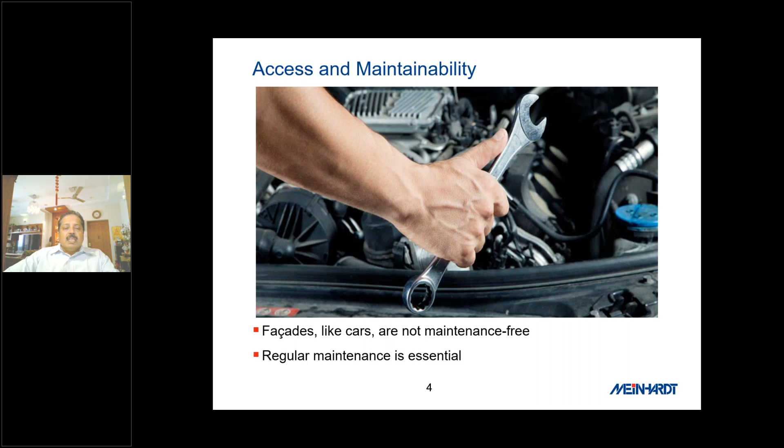Access and maintainability to upkeep the facade appearance is always important, because the view from inside and outside always gives the landmark status to the building. Over time it becomes a landmark to its respective area or geographical location.

Maintaining it extends the lifespan of the building. Regular cleaning and ad hoc replacements have to be done with the BMU for any high rise going more than 40 meters.

Look at the towers and height comparison of buildings, like how this London city looks. Solutions vary depending on height and geometry - 0 to 50 meters, 50 to 100 meters, 100 to 200 meters, and 200 meters and above - now going up to 1000 meters. Reaching that space and maintaining that element is not easy.

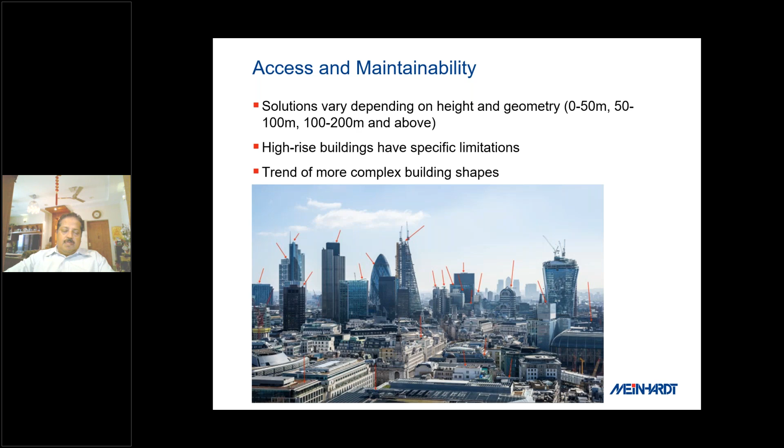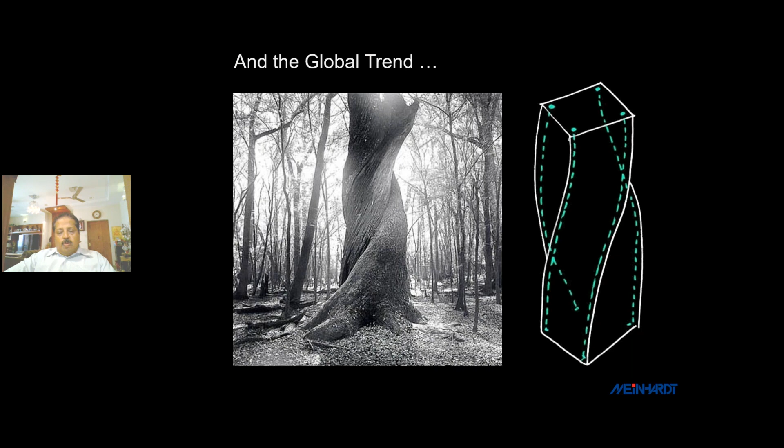High-rise buildings have specific limitations in terms of user requirements, timing, weather conditions, and the trend of more complex building shapes, which is critical for designing any BMU to reach every nook and corner of that facade geometry. In India, buildings traditionally come in simpler forms, not complex geometries like this, but globally the trend is now going toward complex geometry.

Access and maintainability requires additional material costs for glass replacement units, and also facade lighting and maintenance if there's any facade-integrated lighting, as well as opening proportions in the facade for maintenance and access. Otherwise you're not able to reach and maintain the facade elements.

Also, replaceable external features whenever there's damage - how to integrate the design into the building. This is one of the towers where this place is used as a cafeteria.

At the same time, they use it for maintenance in a revolving tower, I think in Kuala Lumpur. So this system is a completely essential part of planning and design for such high-rise towers.

This machine can reach up to 22 meters. You can see the telescopic jib of this cradle, and it's tiltable also.

It must be incorporated in the early stage of design. Anything such as BMU for any high rise, you need to start from the concept schematic stage to incorporate, because this machine's heavy loading reactions have to go to structural consultants. Sometimes this machine becomes 20 tons, you never know. So you have to be extra careful.

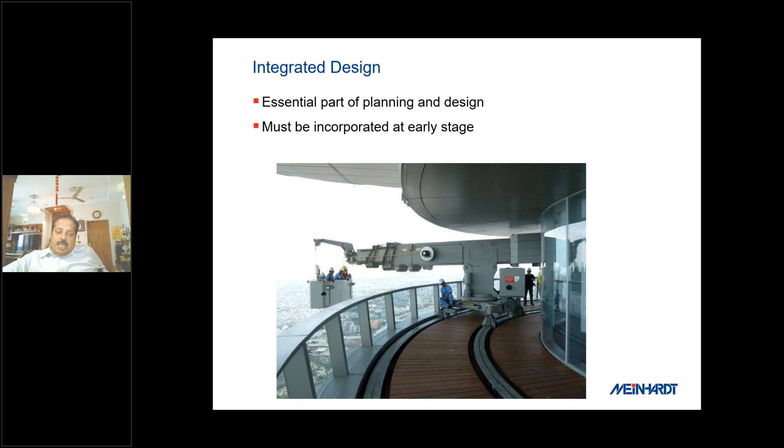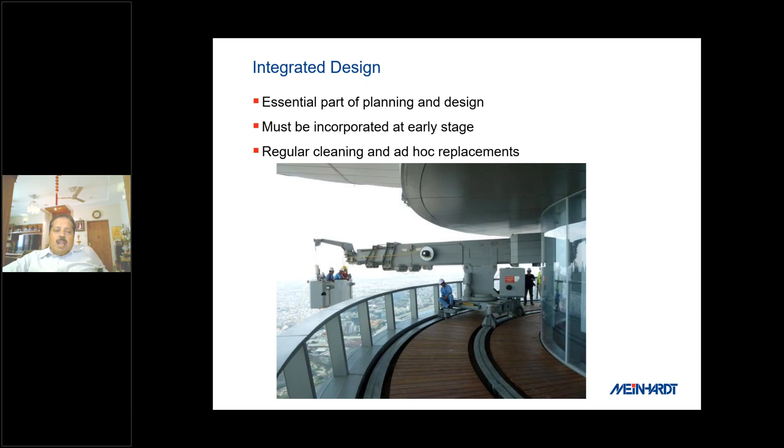In any high rise, you have to take care of determining the BMU system in the concept schematic stages. Regular cleaning and ad hoc replacements also need to be planned at this stage. The integrated design covers initial concept, where you have to zone out the BMU systems. You see the color mapping, elevation mapping, which we always do to identify the system.

Above 40 meters, you need to have restraint sockets at every 10 meter height at the width of every BMU system. Otherwise the BMU cannot drop down from the roof terrace, it rattles through the wind, and sometimes the cradle will rotate and lock, and you cannot evacuate the people. Sometimes we need to use a helicopter to evacuate such conditions where there is no restraint lock. So additional design considerations need to be addressed.

Also, the integrated BMU design - currently we are doing most projects with BIM integrated systems - requires roof space planning, because many things come out on the roof: BME equipment, MEP equipment, BMU, fire tanks, fire sprinkler tanks, AHUs, cooling towers. This has to be properly planned upfront at the schematic stage.

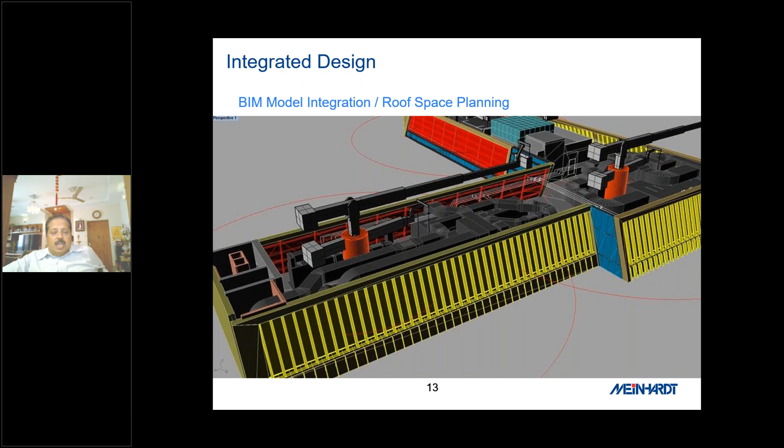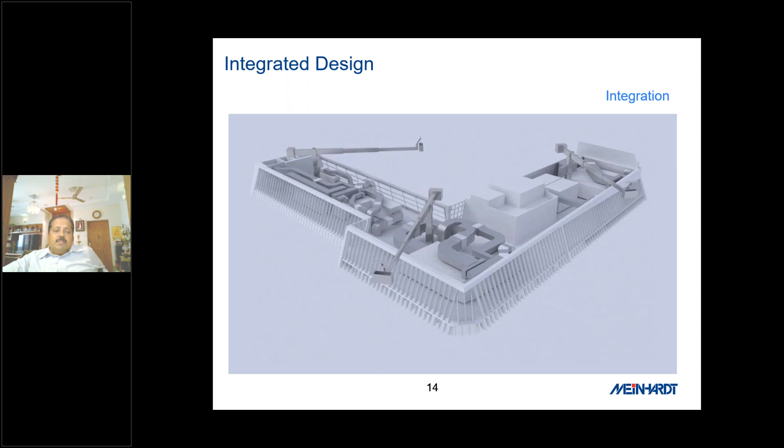You need to analyze how many systems there are, the geometry of the building, the beam, whether it's a sloped facade, and how much jib length is required. All this has to be tracked and trolled around the roof terraces. Very importantly, you need to provide water and power points at every 10 to 20 meter intervals for the BMU equipment to move around and connect. So roof space planning and MEP coordination is key in the concept schematic stages.

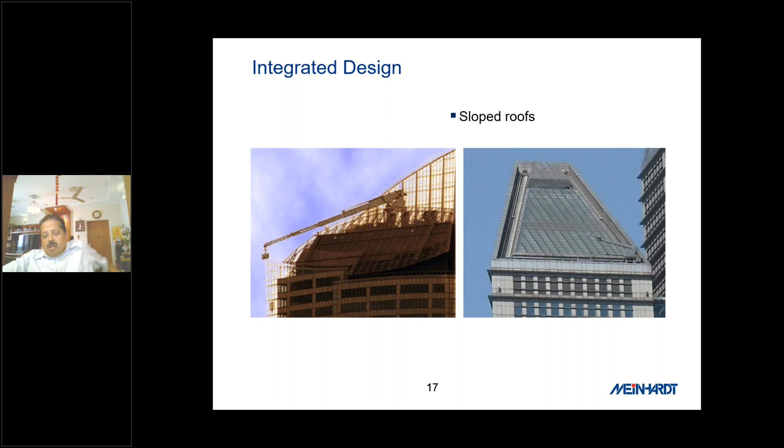Also, for the full extended jib position - currently about 22 to 25 meters jib length is only available in the market for executed jobs. So a full retracted jib position is required for such a cantilever position, and a winch needs to be attached. On the right hand side you can see the yellow rope - soft rope integration is also required for such geometries.

Look at this left hand side image: the cradle started from the left end of the building and transferred all the way here with a soft rope. The soft rope is for restraint, because it has to lift up and go back, remove the rope, and go back. The same way it comes down for cleaning and maintenance, it has to go back because of the geometry of the building.

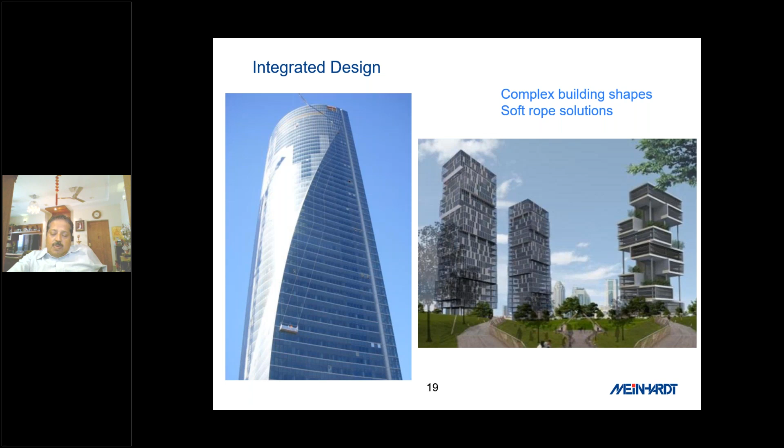The right hand side building is also in Delhi, a project of facade and BMU we did, where there is also a requirement for the extreme right hand jib - a passive rotating tower design concept requiring soft rope systems. There are a lot of systems available in the industry, so you have to customize to the requirement of the geometry design.

These are very complex - not something even a facade engineer alone can handle. This requires a vertical transportation team, and mechanical and electrical teams, to completely review this BMU. Many people just take some drawings and images, integrate them, and it becomes a white elephant. At the end of the day, people end up upselling and the investment goes to waste.

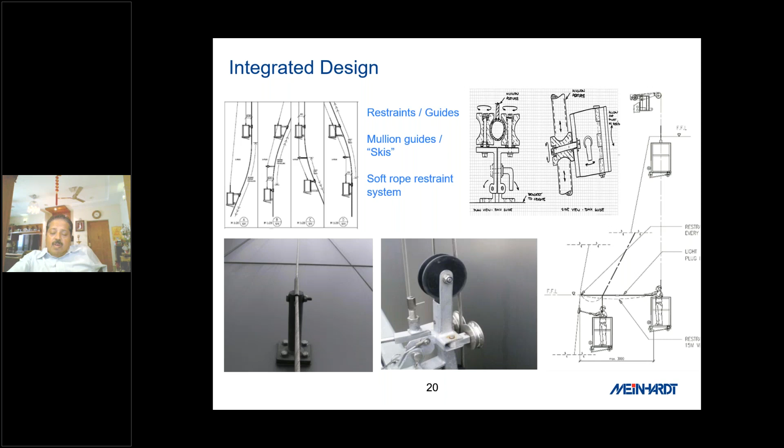Also, wherever not able to reach the place, you need articulated or arm expandable BMUs required, like the hand sketches we did for the project. At the right hand side, you can see that.

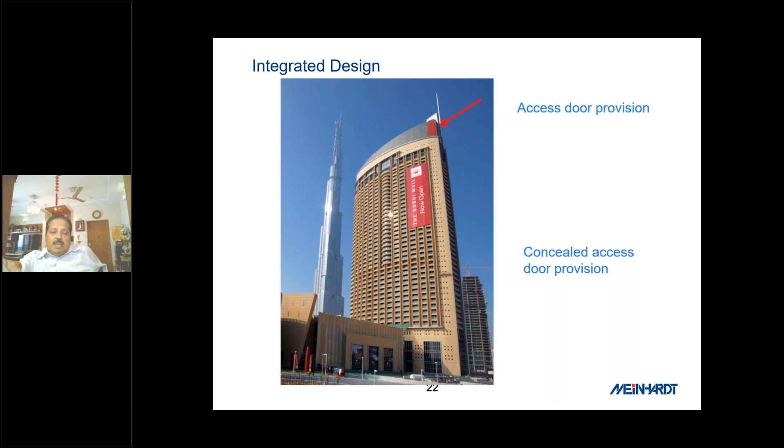Also, access door opening needs to be provided, a concealed access for door opening to access the cradle or anything to enter and operate the machines. Look at this door opening provided, but this aesthetical feature looks like red color. Whenever maintenance point comes, it can be opened, slid open, and locked back.

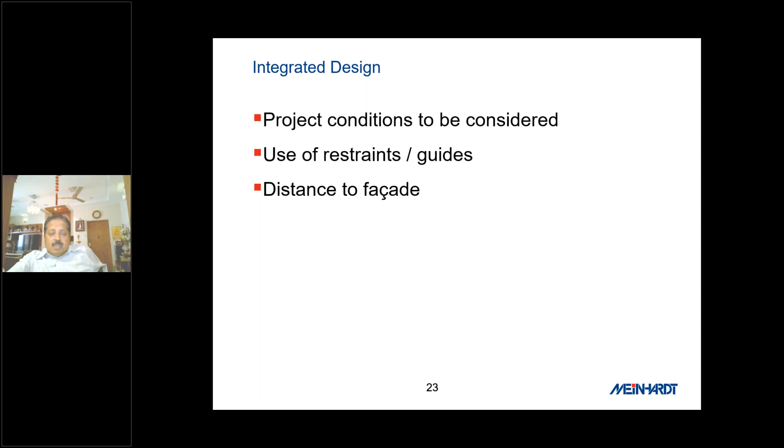The project coordinate conditions to be considered, as I said, use of restraint guidelines required, and distance to facade is a very key factor in analyzing and designing a system. Sometimes the distance goes 50 feet, about 10-15 meters reaches inside. So weather conditions for maintenance required very careful addressing, and other environmental conditions like rain, sandstorm, seismic activity, etc. During this time, you should not do the maintenance.

Citing all above, as I said, we need to see how many types of BMU systems are available in the industry, and this can be customized to suit the requirements for any project.

Sometimes the twin track, like a train track, we need to provide at the rooftop for the machine to travel all around the perimeter of the facade. So the cradle can be walked inside the roof itself, because you need luffing to bring back the cradle to the roof terrace to park in. This kind of roof terrace system will be expensive but safe and reliable.

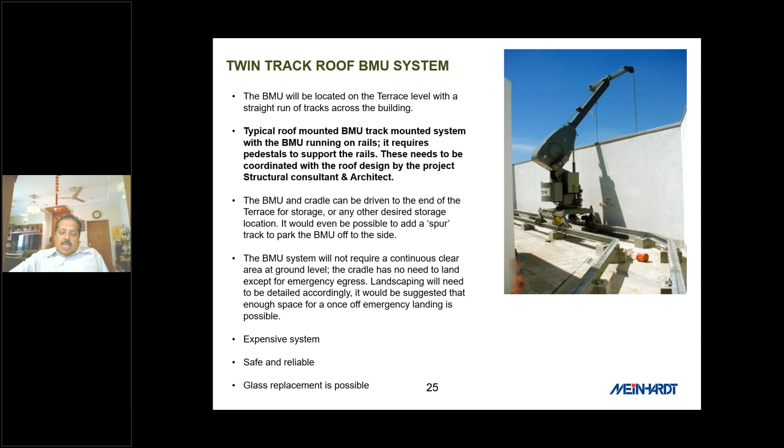This system can also do glass replacements. There are 2 types. Sometimes the parapet is at 1.1 meters, then you can put the track on the RCC slabs. Sometimes the parapet is more than 2 or 2.5 meters, then you need to erect an MS structure to track around this BMU. So you can see both conditions, on the RCC as well as the elevated tracks.

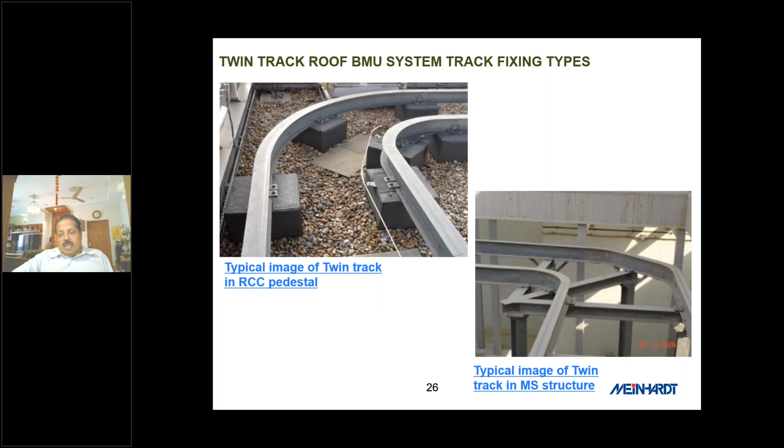Also, with twin track, you can integrate the material hoist. You can lift the glass together with the cradle and go and replace it, or you can do a winch separately and cradle separately. It's all part of designs, so it can be operated from the cradle itself.

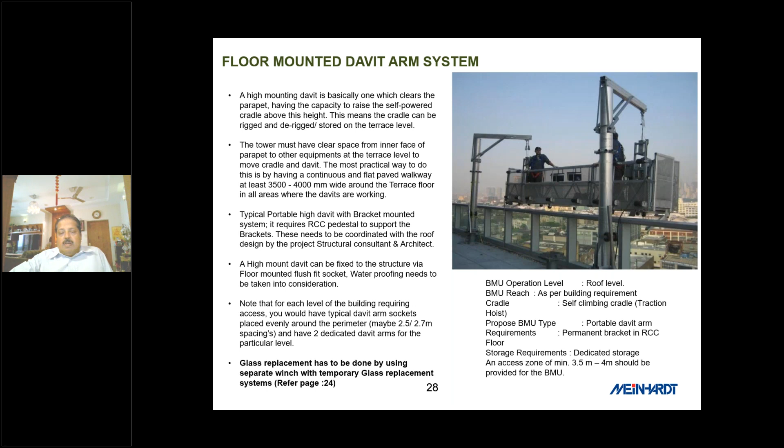Also for Davit, in some cases glass parapets come, then you cannot attach the Davit arms to the parapet, so you have to force it to be floor mounted. This is another system. You can cantilever up to 4 meters. Beyond that, the Davit arm system will not work from the envelope.

Floor mounted Davit arms, you can see these different types of brackets, sometimes concealed, sometimes exposed, whichever way you can do it, but aesthetically you can cover and walk over the brackets. Whenever required, you can open the manhole and put the davits, work, and close back. Still, you can use the access for the Davit arms.

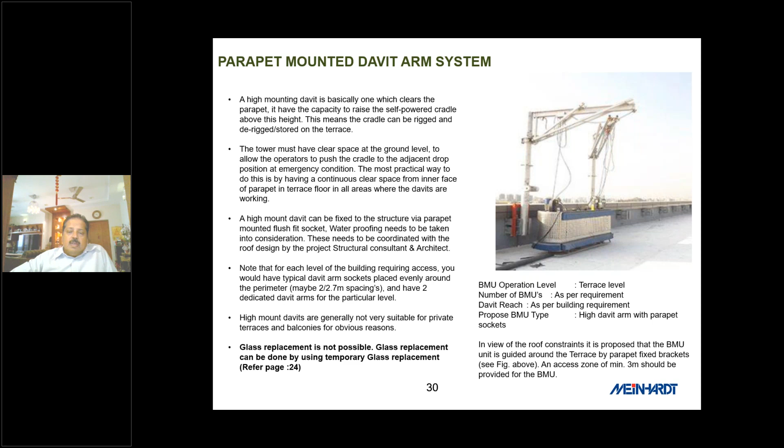Also, this is parapet mounted as I said. You can have independent brackets, or you can mount a rail on the parapet to traverse around the parapet down the thing. These are independent brackets, different types of independent brackets on the parapet.

Also the monorail with the cradles, this can be projected out. This can also be used, but this cradle needs rigging and de-rigging from the ground floor or any terraces below to come up and go down. You need to provide access at the parapet where rigging and de-rigging is required, just a small opening to lock in the cables to the winch and the rail. This has a limitation - up to 1900 mm only we can project it out.

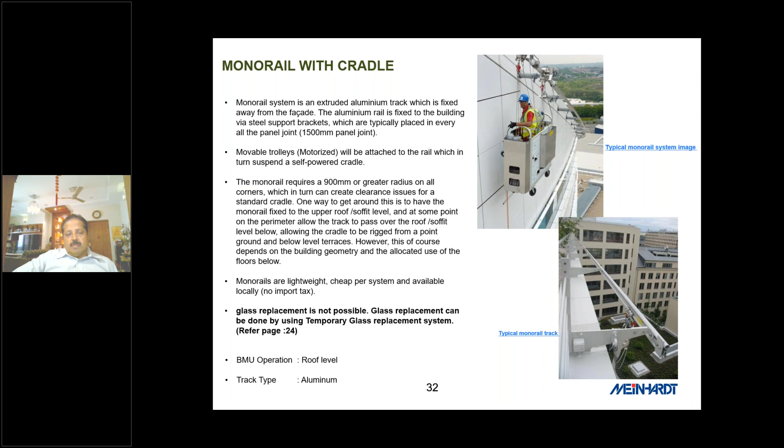Monorail track types, there are different types. You can see, you can travel around the same perimeter of the facade or the geometry of the facade. So you can put all types of monorail systems into these buildings.

Also, another option, up to 50 or 53 meters, you can do without a BMU on the building. You can get these cherry pickers or boom lift machines. There are a few types available. Currently, machines available up to 53 meters height have multiple luffing, maybe 90-degree luffing or multi-degree angle luffing available in equipment.

This is a multi-luffing angle. The earlier one is direct vertical, only one luffing to go recess inside. This is a 3 stages of luffing, so you can get any geometry reach, shown in yellow color. And the right one is only 2 types of luffing.

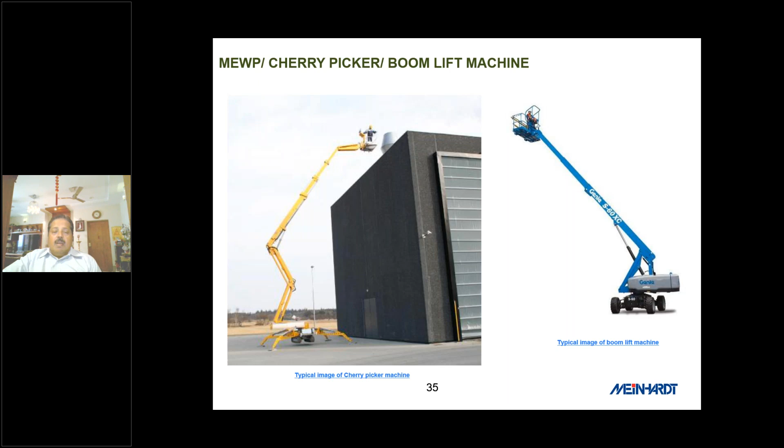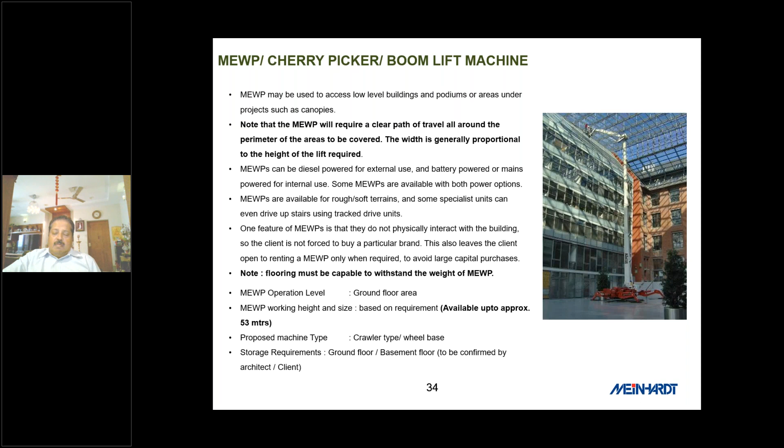The cherry picker boom machines can be used for interiors, but you cannot operate diesel fuel based machines inside because air conditioning smoke comes in. So you are forced to operate this kind of scissor lift by battery operated or electrical operated machines, or you can use a Davit or abseiling.

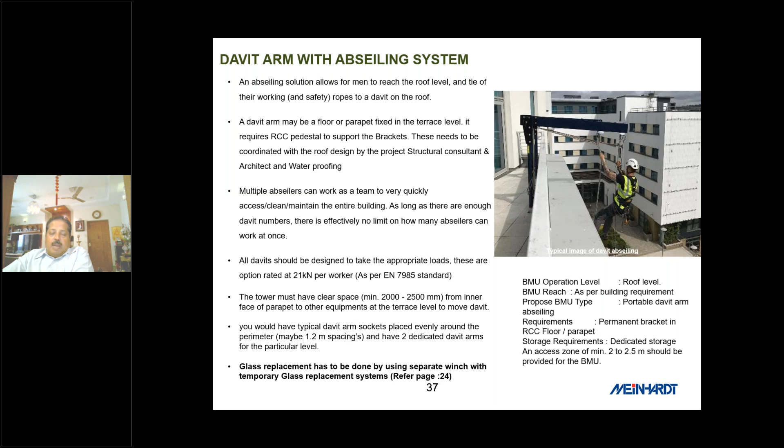Also the eye-bolt system. The next system is a Davit. You can provide for a man to suspend with safety ropes, mounted on the parapet. If there is no parapet mounted, then we can have this eye bolt type, provided as 15 kilonewton tested as per BS 7985. You can put one every 1.0 to 1.5 meter intervals, and people can come and abseil for cleaning.

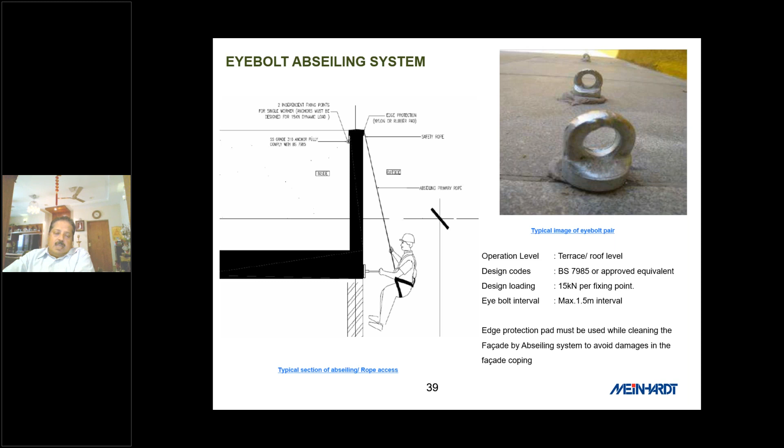We can provide 2 ropes, one for suspending the dead load of the human as well as the jerking load, and a safety rope can be added additionally to this.

These are other aerial working platforms for interiors. This can be different types, available up to 15 meters now, 14 to 15 meters. It can be folded and brought into the service lift to reach any level or floor. The size is about 1 to 1.2 meters width by 1.8 meters. As long as the lift size accommodates this, you can take it inside any portion of the building for ceiling or air conditioning duct maintenance, filter replacement, or ceiling lights replacement and maintenance. Also for interior atrium facades internally, you can use this up to 14 meters.

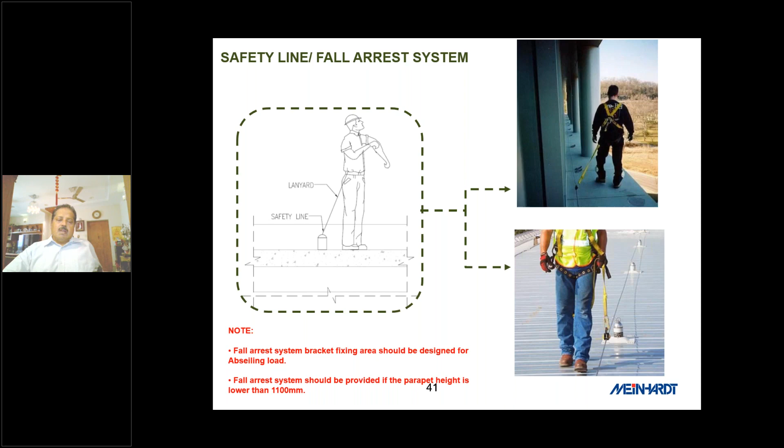Another option is a tucker pole, a cleaning pole now available up to 15 meters in height. You can pump soap and water through this, and you can clean, wipe and maintain the facade.

Then for temporary glass replacement arrangements where a permanent winch is not available, you can use a temporary winch or a Davit system to lift the glass with a counterweight, for temporary arrangements. Again, MEP requirements are key.

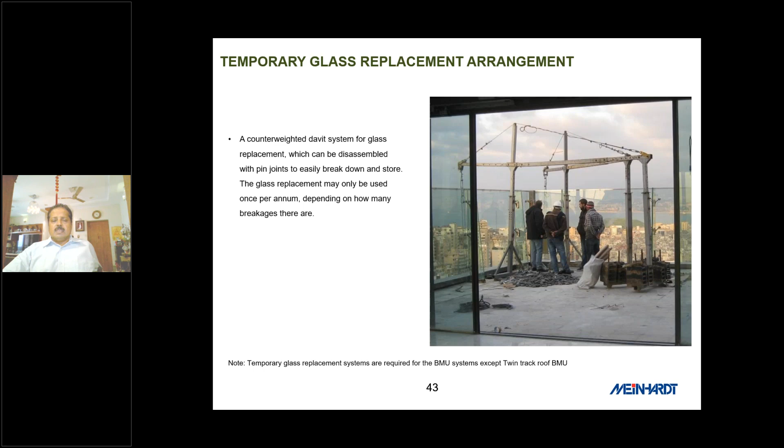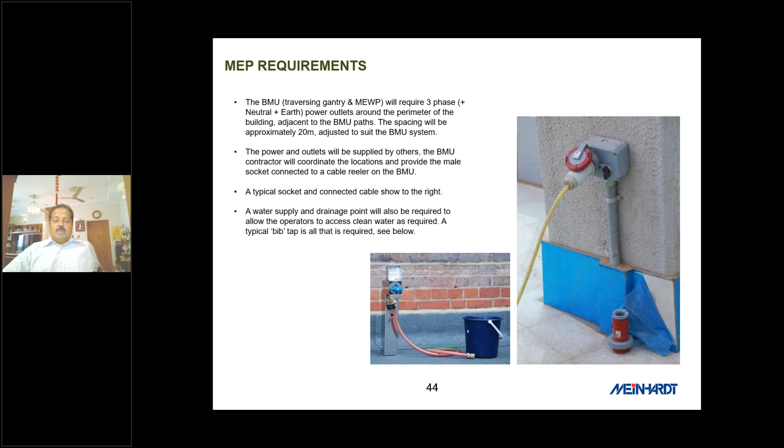You need to provide power and water at every 10 to 15 meter intervals. You should not exceed 20 meters, so that water fluctuation and power fluctuation reaching the machine is key to achieving proper water pressure also.

On facade maintenance and optimal BMU design, I want to give some thought process and awareness that regular maintenance increases facade life. If you do not regularly maintain the facade, its lifespan will decrease because the sealant and gaskets need to be cleaned of dust and pollution, and any insect formation inside the groove or elsewhere should be cleaned and properly maintained.

Also glass should be cleaned. Any external reflective glass or other glass may corrode if not maintained properly, due to petrocarbon emissions from cars.

We also provide consultancy for all projects. We've done nearly about 150 BMU system projects in India, and we provide cost-effective solutions, offering full consultancy from concept to completion stage, including testing, commissioning, and the defect liability period.

We also take a holistic and proactive approach to maintenance and component replacement. So whenever you have skylighting, you need to provide abseil hooks, also required for such complex replacements, where you're not able to erect a scaffold or access from ground level. At least you can bring the glass from the roof side if someone needs to maintain these facades from underneath.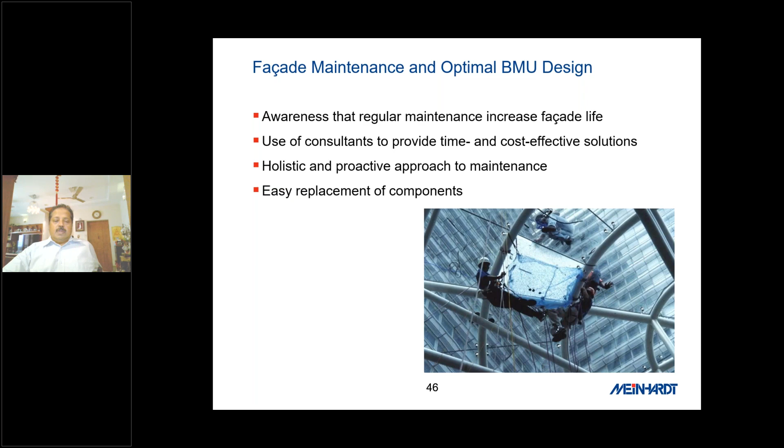Look at this shape and geometry of this facade. So you need to address this geometry for maintenance during the design process.

So the projection and geometry of the building is very important, as well as safety is the first priority. Whenever design is not done properly, or the suspended load is not proper, or overloaded, this kind of concealed monorail damage occurs due to overloading, improper bracket center distance, installation issues, or quality of workmanship, all this leads to life safety concerns.

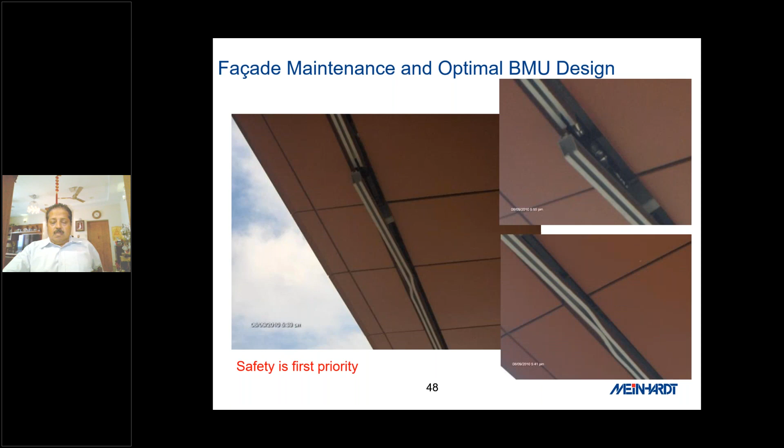Sometimes you can Google it, BBC has a video on one of the worst BMU accidents. You can find how the machines got blocked and were unable to recover, so people got stuck in the roof BMU cradles. They had a design of an integrating system, like a telescopic cradle, where it got stuck. There was no proper design, so it got stuck, and they were unable to recover, and the people remained stuck there. So they used a helicopter to evacuate them. You can watch this video on BBC.

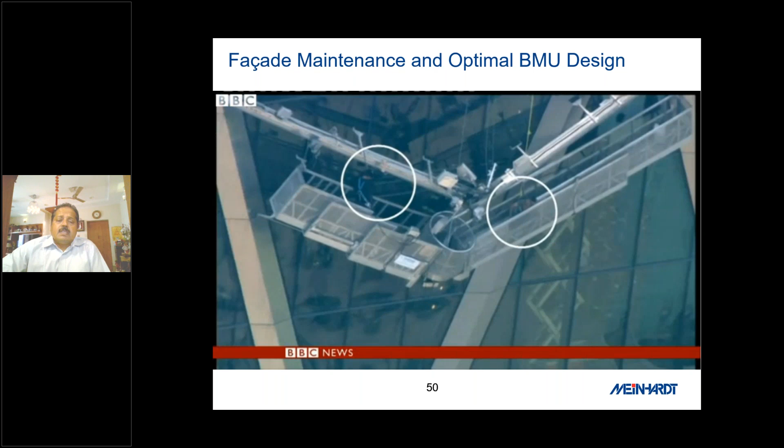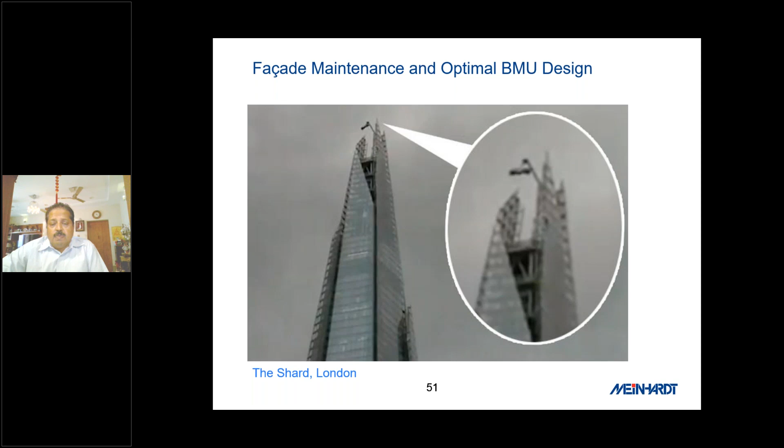Another accident happened at the Shard tower in London. The BMU got stuck there, and they maintained and repaired it. So proper maintenance, the BMU system also needs maintenance, the facade also needs to be maintained. This design should be followed accordingly for the lifespan of the building.

The key important things we're addressing are stainless steel bolts, nuts, and washers. Over a period these lead to huge failures. At that time you have to take out the machine and replace the bracket, which is all high cost. So whenever you design a BMU, use the right material, account for bimetallic corrosion, and properly design and use SS bolts and nuts.

So BMU testing is key. We do a complete review in the post-construction stages. We review the complete drawing thoroughly, and check each and every component, because it's a life safety issue. We address the issues based on EN 1808 code and 7985. That is the most stringent code globally, and these codes spell everything out.

Even America and other parts of the world, China, Hong Kong, use very high-end BMUs, but Europe doesn't have as many buildings. Still, European code is stringent, and globally people are adopting European codes. Most of the machines and hoists, all types of hoists, traction hoists or other types like drum hoists, are manufactured and tested in Europe under EN 1808 and EN 7985 codes. So it's better to follow EN 1808, which is the most stringent code as of date.

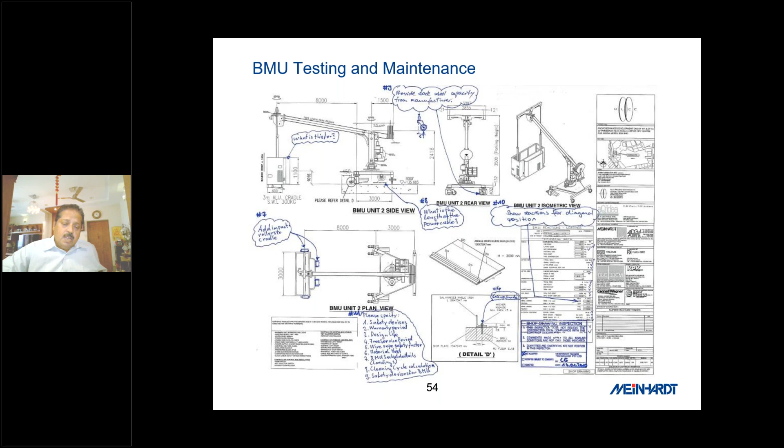So we review the tender documentation and specification, and we follow EN 1808 and 7985 and other codes related to respective regions, whichever is more stringent. We also do testing in the factory: complete load test, operational test, mechatronics, everything we do in the testing factory before shipping to the site.

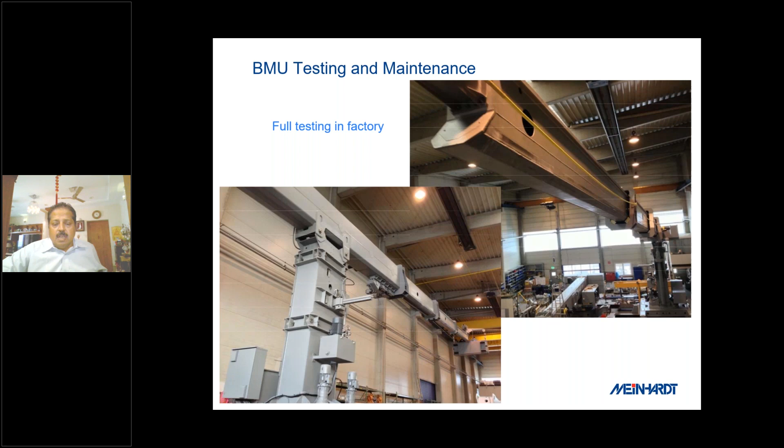We also check long travel limits and electrical cable reel limits multiple times, and ensure these should not get stuck or locked during operations after installation. We also do a load test together with a human, and also do lifting without a human, checking the counterweight loads on top of the human loads.

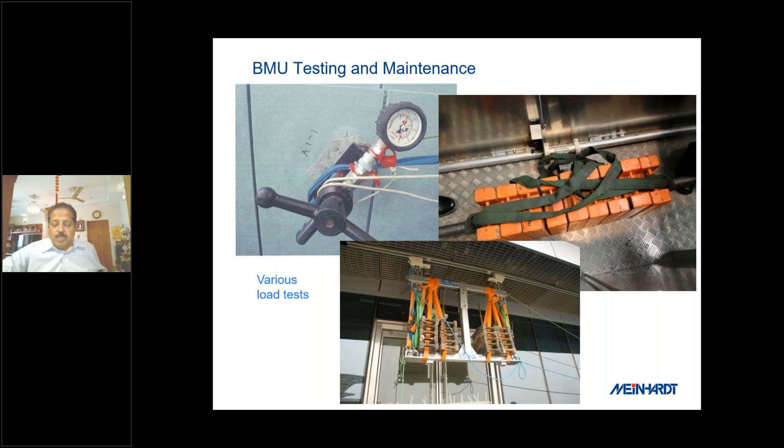Complete testing is required for BMU equipment, even pressure tests are needed. This ensures that 100% testing is done at the factory. Then the machine can be brought to the site and installed, and then you can do on-site testing.

Again, I'm saying the maintenance and testing and maintenance of the facade is like a car. Please ensure that whenever providing a BMU to your projects, it requires periodic maintenance of the equipment as well as facade maintenance. There's a facade cleaning cycle, typically 3 to 4 times per year. There's a calculation for it, depending on the type of machines and everything installed in the building.

So we have also addressed this, and during our design and documentation or tender documentation, we provide a user manual for the cleaning cycle as well as the equipment maintenance cycle. We ensure that the vendor also adopts the same, to follow the spec and tender to comply, and to erect the machine, manufacture and commission it.

After commissioning, we recommend putting the maintenance period after the defect liability period, at least 1 year. So the same contractor or fabricator of the BMU who manufactures, tests and installs, can also maintain the facade, and you give another 1 year for a maintenance contract. So the machine will be fully operational, and then the facility management team can take over, or the same contractor can do continuous maintenance.

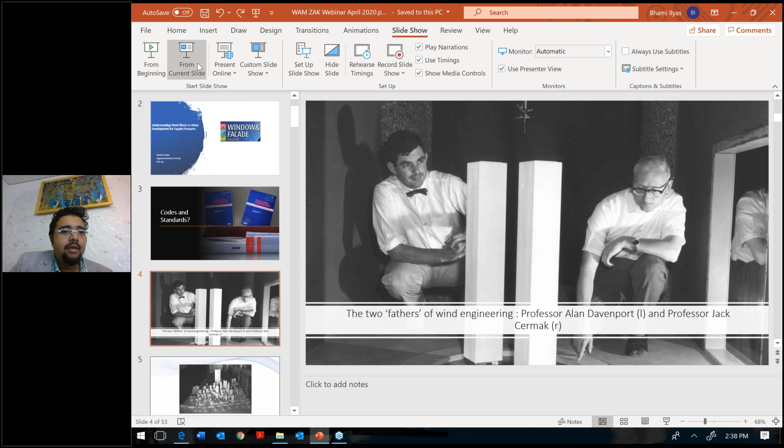What you're looking at here is the two fathers of wind engineering. I hope you're able to see the slide in full. If not, let me know. Put it full screen. Once it's okay, if you press play from the beginning, it should be fine. Yeah, this is fine with us. It's full screen, you're able to see.

Okay, great. So back in the 1960s, this all happened. One of the founders of CPP, Professor Jack Cermak, was working in part for the World Trade Center towers, the Twin Towers. With him is Professor Alan Davenport. Essentially this happened in the 1960s in the lab at CSU, Colorado State University, near Denver.

What you're seeing here is an overview of the proximity model with the Twin Towers. The key findings, the start of the wind engineering era, actually started with these iconic towers back then, and one of our founders, Jack, pioneered this process.

When you start to look at wind engineering as a process for design, one of the key elements you need to consider is a chain, what we call the Alan Davenport wind loading chain. What you see here is understanding the response of the structure to the wind. These are the 5 links.

What you see here is the wind climate, the influence of the terrain. The wind climate is nothing but the climatic conditions. Influence of the terrain relates to topography, the aerodynamic effects of the structure, the dynamic effects, which are the properties of the structure that the structural engineer prepares, and the criteria built in. So it's a sequence of events.

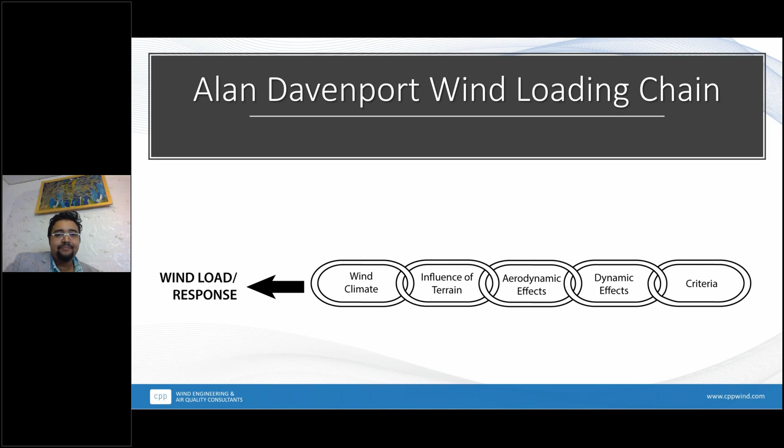The bigger picture, when you look at it here, gives you a depiction of all the things that come into play: bluff body aerodynamics of the structure, meteorology, wind climate, testing, structural dynamics, and also a slide on CFD.

This is something I'll touch on before we end, what we call in wind engineering CWE, computational wind engineering, whereas CFD stands for computational fluid dynamics. CWE is a branch of CFD, and to what extent these things are used, and how you as a designer can use this as a tool, is something I'll cover down the line.

What we are covering today is primarily the facade pressures, but it also typically relates to the structural loads as well as the comfort levels.

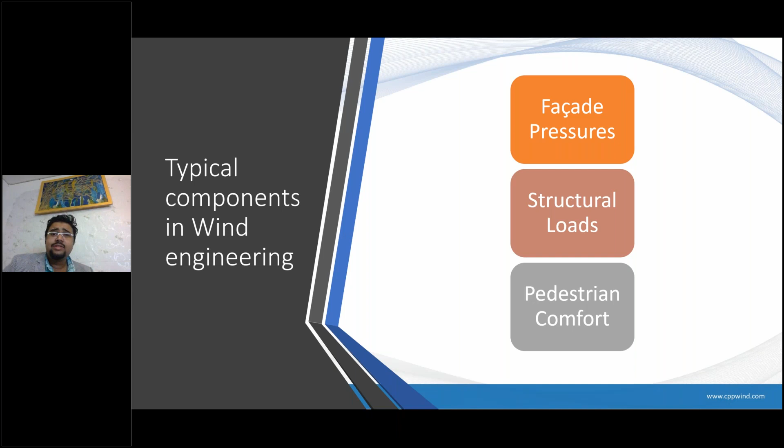So where it all starts is we need to understand the data — where is all this data coming from? Anemometers placed across the world. At CPP, we have tons of data collected from airports across the world.

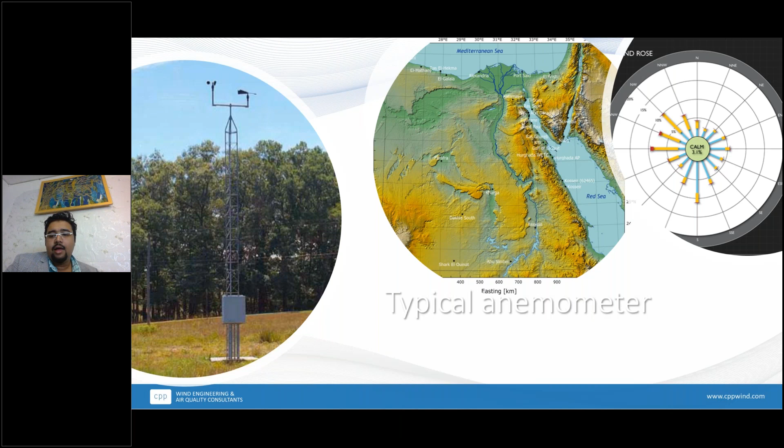Let's say in India, in Dubai, in the UAE, in Europe, and all parts of the globe, we collect this data in tie-up with meteorological associations, and we get them. There are also big sources of information, including from the US Department in the States.

One of the key things before you understand wind as a process is to look at your topography. When you take a land piece and look at it, this is also evident in codal provisions where we mention urban, suburban, open country, and flat - different scale layers of topography of buildings and areas, wherein you can assign different parameters of reference to it.

This is exactly what happens. The wind interactions with these areas, urban versus suburban, are different. This is exactly where we go in and simulate in the wind tunnel, and we do that for every 10 degrees. I'll show you the tunnel picture shortly, showing how this process is actually done.

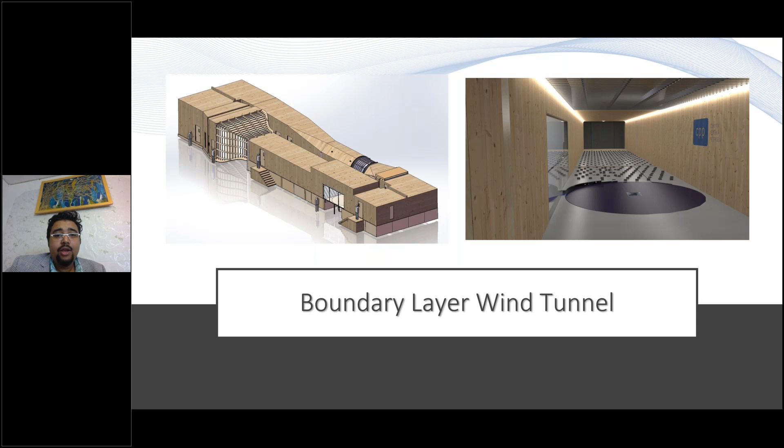What you're looking at here is the boundary layer wind tunnel. This is one of our newly designed tunnels in the US, in Colorado. What you're looking at here is an ABL tunnel, what we call atmospheric boundary layer wind tunnel. I have a picture that shows what these actually stand for.

This is a sample of a project in the tunnel. You can see at the back there is a fan - it's black, and now you're able to see that. Then there are spires and roughness sheets to create the turbulence that's required, your surrounding model, the disk, and then your test model, which is our project, whichever it is that we're testing.

What happens is that the surrounding model, that round circular disk, actually rotates every 10 degrees so that we can simulate what kind of roughness parameter the wind flows across. We need to capture the data. And if you look at the roughness sheet, you can see a lot of patches on it.

So what these patches are - this is something unique. What we have is called an automated roughness sheet. Back in the days, it used to be manual - people used to change them to simulate all the different urban and suburban conditions, but now it's all automated. So based on hilly terrain, non-hilly terrain, open terrain, we change it computerally, we can adjust them.

As the technology goes ahead, the fundamental behind this science is nothing but the coefficients that get into the picture, in which we capture the CP data, what we call the coefficient of pressure. This is essentially time history data that we capture, and directional CP data, which we then process.

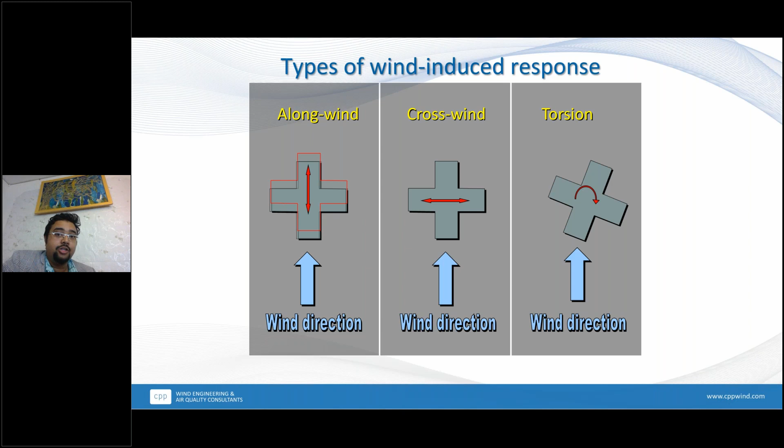We then process this to calculate our pressures. One key understanding that people often misunderstand when they imagine wind tunnel testing is that there's a wind interaction and a building being tested. The building is tested with regard to the wind interaction on the surface, the architectural form of the building, like what you see here.

It is not actually replicating the climatic condition. Let's say that project was in New York - we are not creating a New York climatic condition inside the wind tunnel. So what happens with regard to the wind climate is a different piece. Remember that chain I showed you a few slides back, the Alan Davenport chain, the wind climate - that's a key piece.

That is something we add on after the wind tunnel testing process. So once you capture the CP data, which is the interaction of the wind with regard to your surface, we add on the wind climate in the post data, and that's where we process all this airport data and bring it in to calculate and apply to come up with the final pressures.

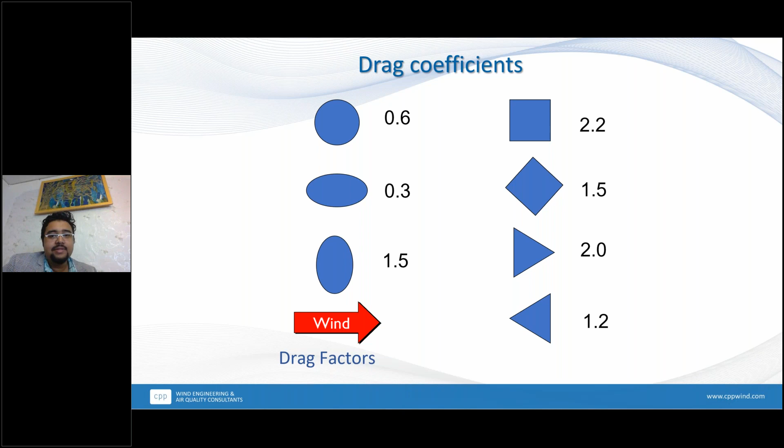So these are different coefficients of different surfaces. I think this is one of the key things within the process as we do this in the industry - we have designers where the results that come out of the project sometimes show loads going very high, or you need to fine tune and refine it. So what we do is go back to the wind tunnel, and in some cases we have these workshops where we go in and tweak these buildings.

This is a very interesting architectural piece of work that we do, which is tapering, openings, cross section changes, softening. This is all in line with the architect and the structural engineer, both of them at the table. This is something we do more like a workshop in some instances, based on feedback on how the building behaves, and then we bring down the responses in the structure.

This is a small video here. I'm going to play it.

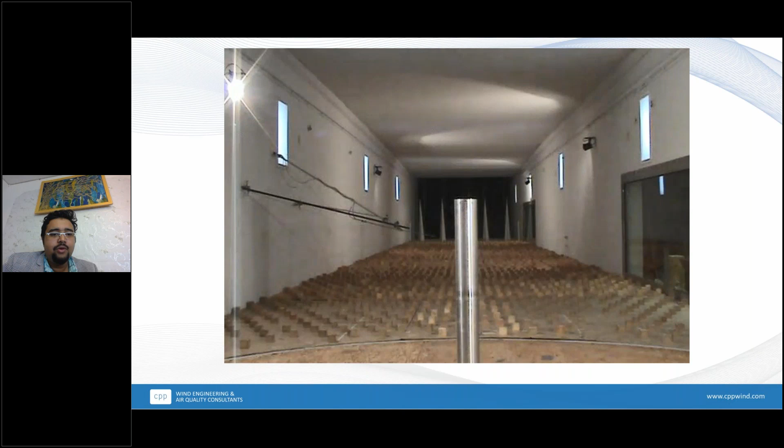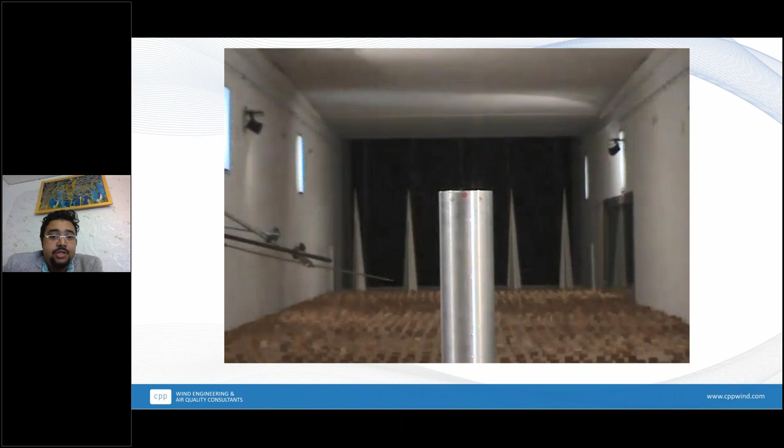It has no sound, so you can see it's a tube that sits in, and what you're seeing right now is the wind flowing in from the back, and you can see the cylinder. Look, focus on the red dot, and you can see that the cylinder is moving.

Now, what you were just experiencing is something called crosswind loading, which typically codes don't take into account. This is where that oscillative motion, when the wind comes from one direction and starts to move, is captured, and I'll tell you in a moment why we showed you that and its significance. Before that, to visualize how the flow actually happens, you need some dye, because as you see, it's a fluid. Let me show you this video.

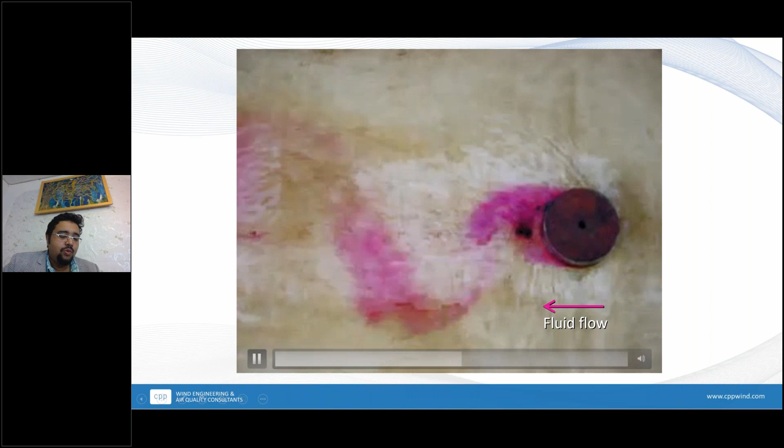So what you saw was actually vortices being shed from the cylinder. That's exactly what happens, and it's not visible to our eyes. So this is the process actually. Interestingly, there are different phenomena that happen, and one other one is the interference effects as well.

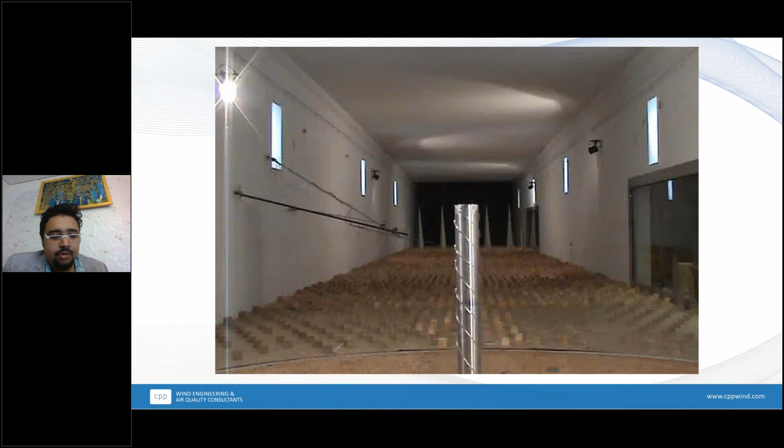Now we'll come back. Bhami, I would like to interject, can you play that video one more time? We couldn't get enough clarity on how it flowed, so if you don't mind, could you repeat that? Yeah, thank you. Yeah, sure, Amit.

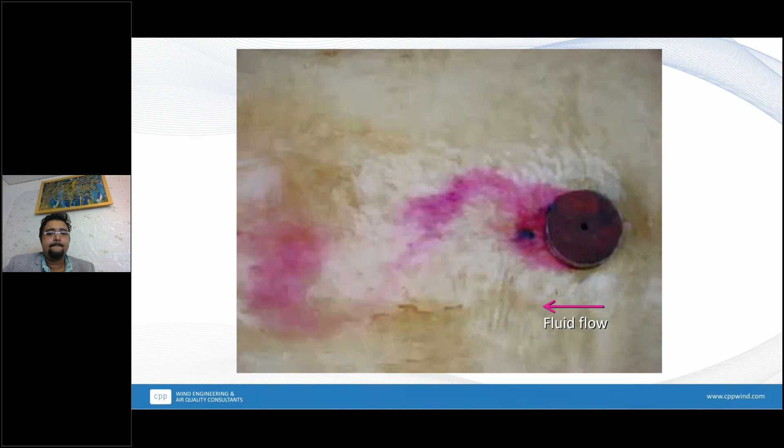I hope it worked this time. Yeah, thank you. Thank you.

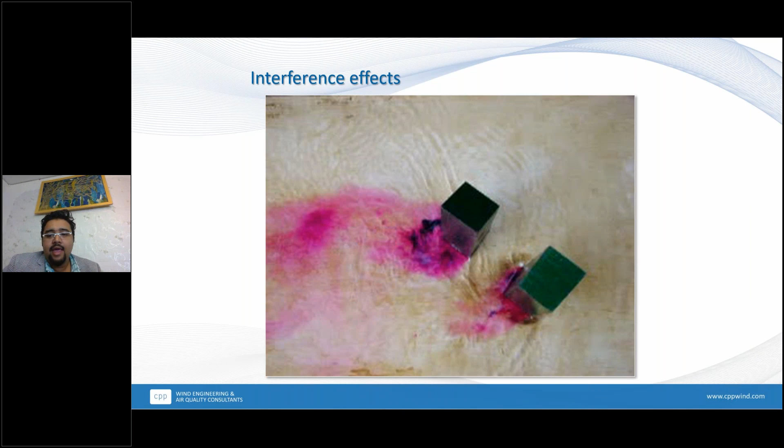So what we saw was that the dye in there shows the behavior of the vortices, what we call in aerodynamics, and interestingly, that's not visible to our eyes. That is why now, if we go to the next video, it shows what we've done: the same cylinder experiment, but simply adding a helical spring to it. Now what happens is that with this helical spring, if you notice, the motion actually dies down much more.

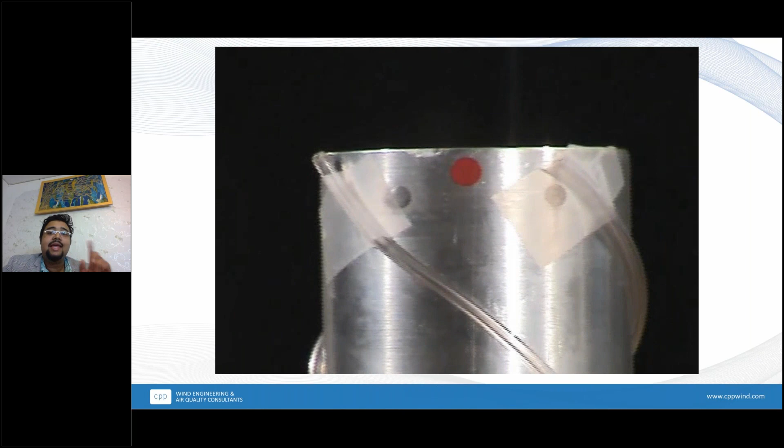There's no sound for this video. So what you're looking at here is again the wind coming from the back, and that motion, if you look at the red dot again, has been damped. This is a very fundamental example that you can see anywhere, especially in industrial places, where chimneys have helical springs going around them. This is one of the key reasons behind why they put these helical springs in and around cylindrical chimneys.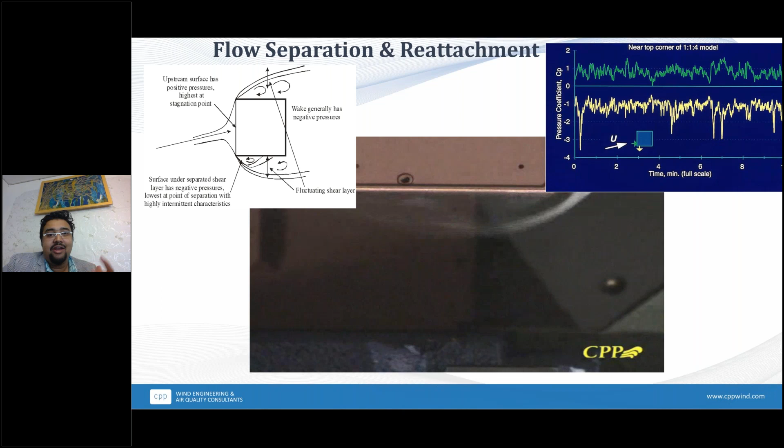We especially do this in workshops to show you, just like the dye process we saw earlier in the videos with the red dye. This is another way to give you a feeling about how the wind actually flows in and around the corners. Looking here, I'm going back and forth with the slides.

You can see at the top right what you're looking at - it's the positive versus negative suction. This is the time history data, the CP data that we pick up from the transducers in the tunnel, and what we process after the test.

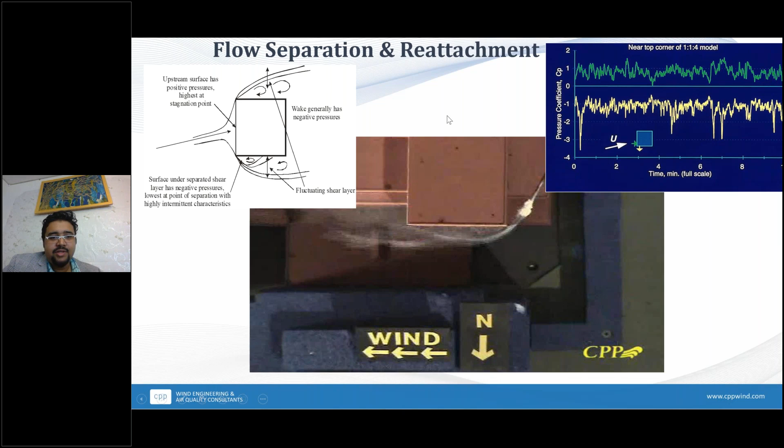What happens is we grow the models, we instrument them. This sometimes becomes a painstaking process for our builders in the lab because of the different features the architects bring in, different facade features as well, and then this has to be drilled to install different sensors. You can see that copper tube - that's actually different sensors going in, and some of these had to be drilled and fitted in with immense care.

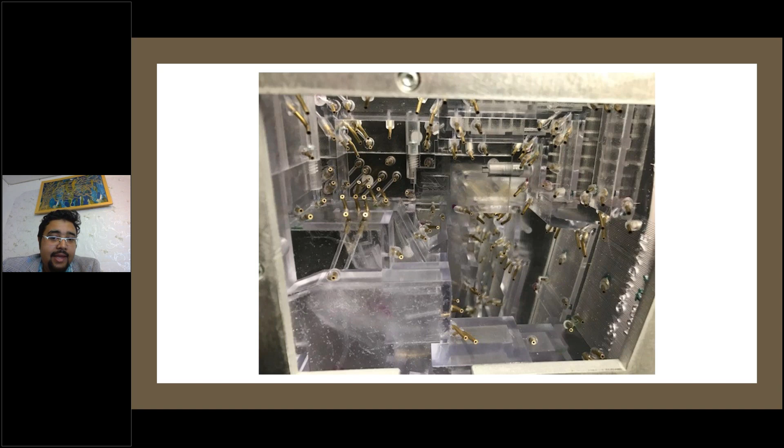That's a finished model in there. Now what you're seeing here is a spaghetti, if I may say. It's the Marina Bay Sands, one of the iconic projects we've worked on - we're also working on the new one that's coming up. You can see the number of tubes that go in underneath for these pressures, so it's quite an interesting amount of work that goes into it.

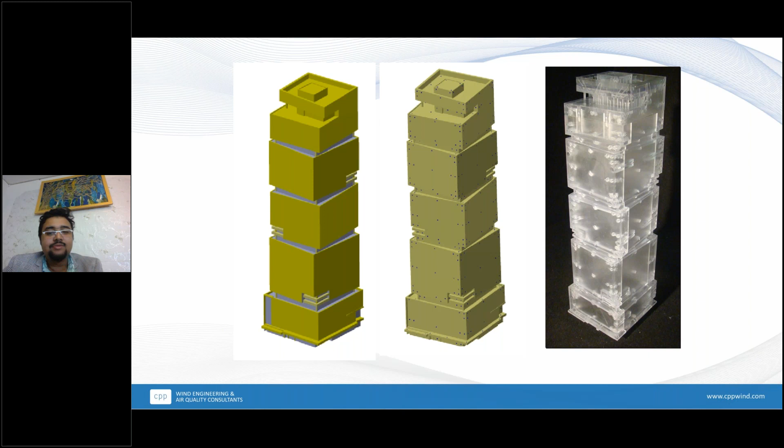This is the process at different stages, and this is where I need to slowly bring in - to show you what exactly happens once the product is finished, what we present as zone diagrams. Our facade consultants get the pressures, the different pressures that are required, and this is exactly where the teams can go in and pick out the hotspots, if any, and actually design the facades for that part.

And interestingly, this is also done elsewhere. One question that comes up most often is, does this only apply to high rises? No. Especially with regard to cladding, you can actually achieve an economical design with regard to budget if you perform this process - even on a long span building that is completely facaded, because you are finding out where the hotspots are and where the different zones are, so you can work with the facade curtain wall consultant to help them narrow down the pressures.

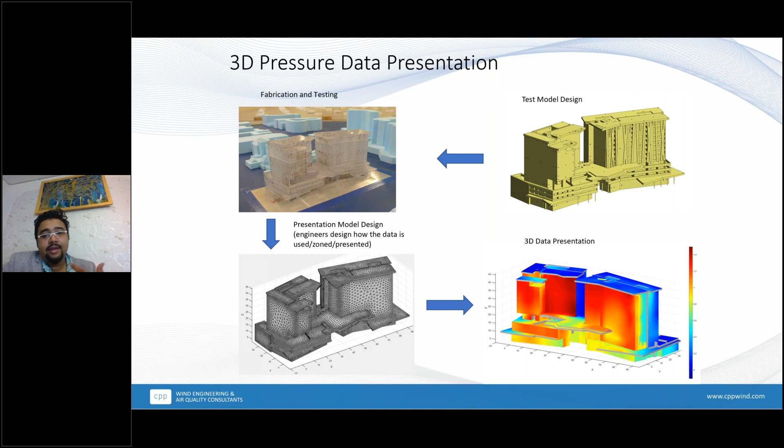What you're looking at here is another way of presentation. Depending on our end user, we tend to incorporate different variabilities. You can see that after the fabrication, there is meshing being done, and then it's being presented even in contoured, colored forms. This is one of the newly updated features where we tend to give emphasis.

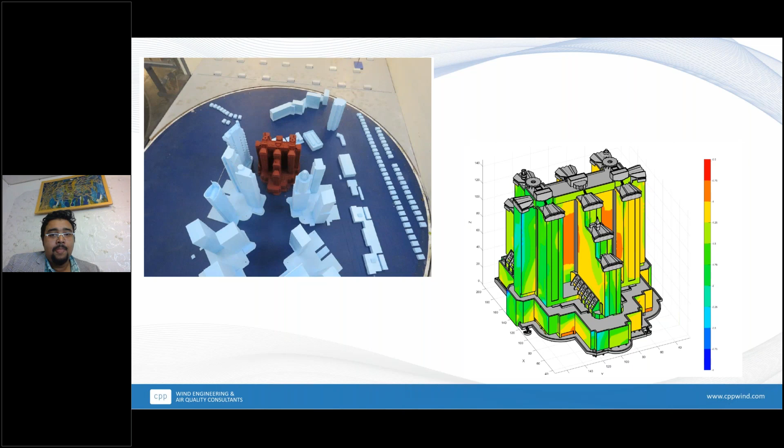A doctor was killed, apparently - a very unfortunate incident. We got a call one night to go in and look at it to mitigate this problem. This is one of the comfort criteria issues that happened within a building facility, and we had to go in - this is what you see here, inside the wind tunnel.

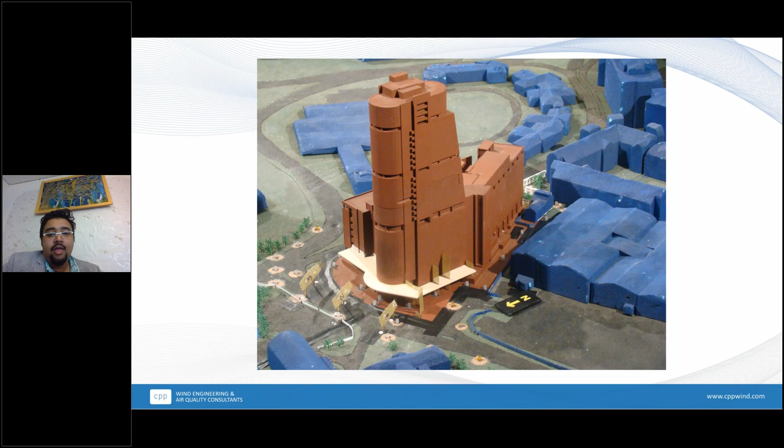We have to bring in those mesh-like features around the building to actually stop the funnel of wind. In some instances, it really shot up to about 120 kilometers per hour. So quite an interesting thing that was happening.

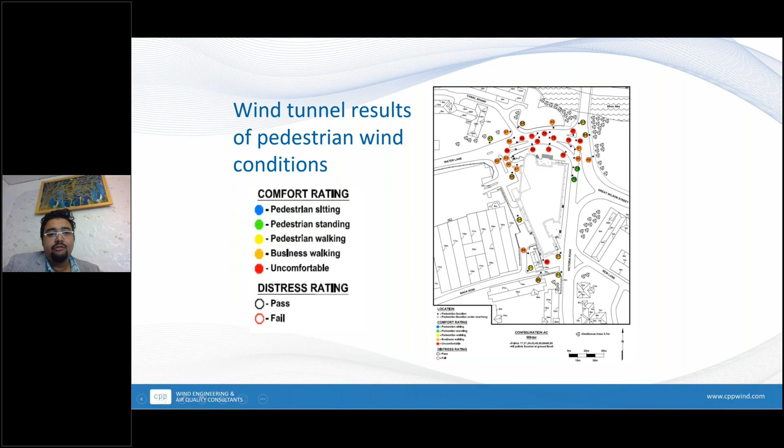Finally, apparently the design team didn't account for it initially during the design process, and then this had to be fixed. What you're looking at here is we assess them in different ways, looking at comfort, what's typically called Lawson's criteria.

We also integrate them into different tools. This is one of our Wind Lab software that we use as well with the clients, where we can help the end user, whoever it may be, to actually visualize it and use it in a 3D form.

Now, one of the key things we need to understand is there are different tools we can use throughout when we're approaching this. But in the industry, especially within wind engineering, one area of agreement is pedestrian comfort. Yes, you can start to use CWE, which is a computational CFD process, as a vis-a-vis with wind tunnel, but not for the structural or facade pressures for the cladding. The research is still ongoing, but it hasn't developed there yet.

The problem with CFD is turbulence modeling, and turbulence modeling is not there yet to predict for your strength design and the facade pressure. So that's one of the key reminders I'd ask you to take home, because as consultants and designers in the industry, we need to be aware of the right tool to use. Especially with a CFD process, it's always what you give as input is what you get as output. It's garbage in, garbage out. So you have to be very wary of the input that you're giving.

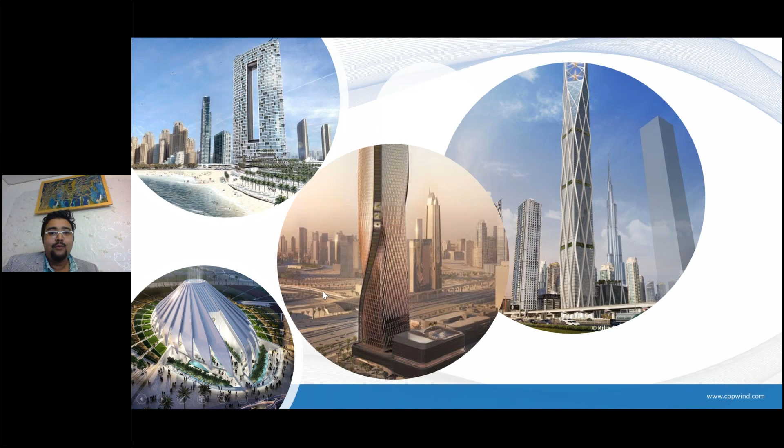Before I conclude, some of these interesting iconic projects we recently concluded: Expo 2020, UAE Pavilion, Address Hotel, SRG with Killa Design, De Simone, Calatrava — all different design teams that we have worked with recently. I think with that, I conclude. Thanks for having me, guys.

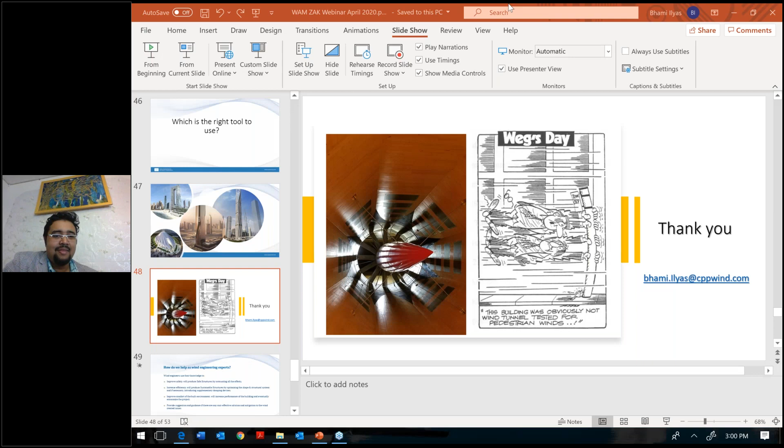Thank you very much, Bhami. It was pretty interesting because I've never seen anything that interesting, and there are so many elements about the facade. I was just going through the list of attendees - I have lots of friends who I've known personally for a very long time, and I was kind of happy to see that, it was pretty interesting. A lot of people I've known for more than 20 years are already on this webinar at the moment. So I'd like to just share my screen with you guys for a second.

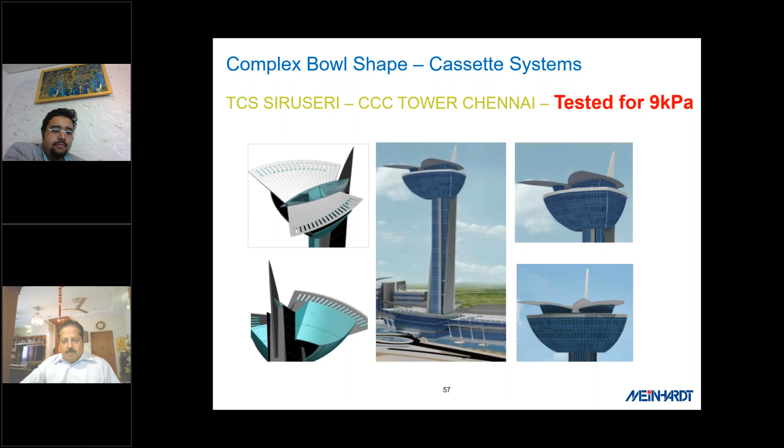We did, let me zoom in on the images. We did 5 different geometries. Look at this, this is a completed image, and you can see this geometry.

We put abseiling hooks. Actually there's a need for heavy equipment, like as I presented earlier, a car windscreen wiper type equipment, that inverted one on top of the parapet, which we can maintain, but it's too expensive. For such a cantilever, the deflection on this cantilever structure is already around 90 mm. On top of it, on the rooftop, if we put this equipment, the structure has to be heavily designed, and for such a condition the shaft would be running on a core, with the structure standing on a core wall. So we decided not to put these machines.

Then we put an abseiling and retrieval system. So if you zoom into these images, Google this TCS Siruseri Tower, every 1.2 meter square on this geometry we provide abseiling hooks, so that you can lock the hooks with both hands. Extending both hands left and right, you can reach 1600 mm, so we designed a hook spacing of 1.2 meters, so any human being can hook left or right, top to bottom, above or below. So we made this abseiling system to maintain this geometry, then we can finish the cleaning and maintenance, and you can come down.